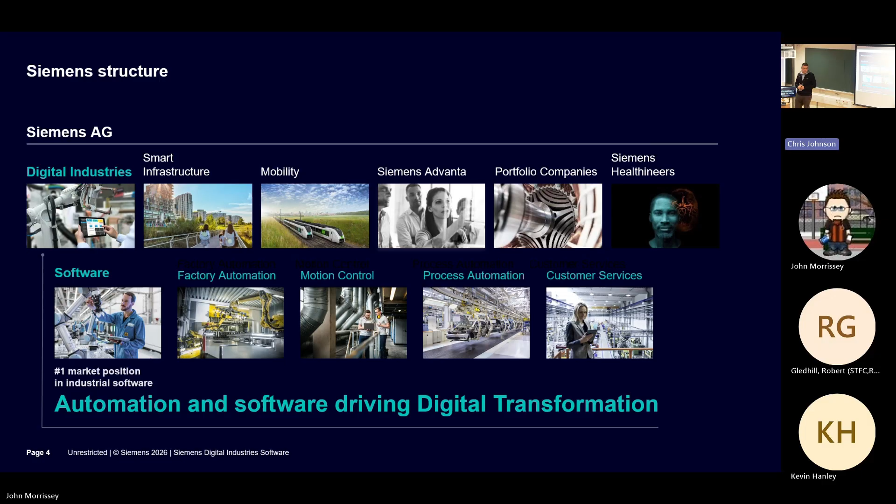So why combine DEM with AI? First, very briefly about Siemens. As part of the large mother company, which I'm sure you've heard of, there is a sub-company called Digital Industries, which focuses on software technology, and I work in the software division of that company. It's its own company, headquartered in Texas. And that company was very aggressively grown through acquisition, which is a trend we see in industry today with simulation software and, well, generally technology.

Because of the complexity of the problems that the customers are facing, the solutions are multi-physics, multi-method, and also require compute and require IoT. So a very broad portfolio of tools is required. The customers don't like to deal with multiple vendors. They don't like to integrate multiple vendors together, so they're looking for a one-stop shop for all those tools and interoperability between the tools, and that is why in recent years we see very aggressive agglomeration of software vendors into a small number of massive players.

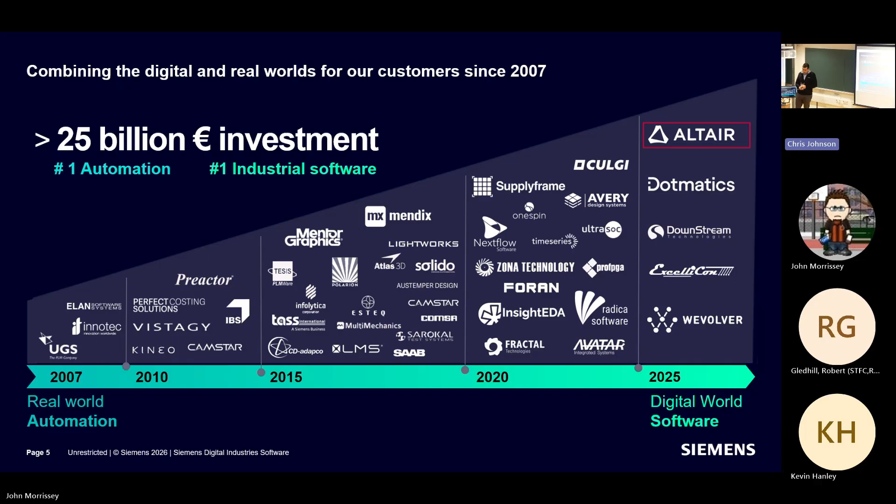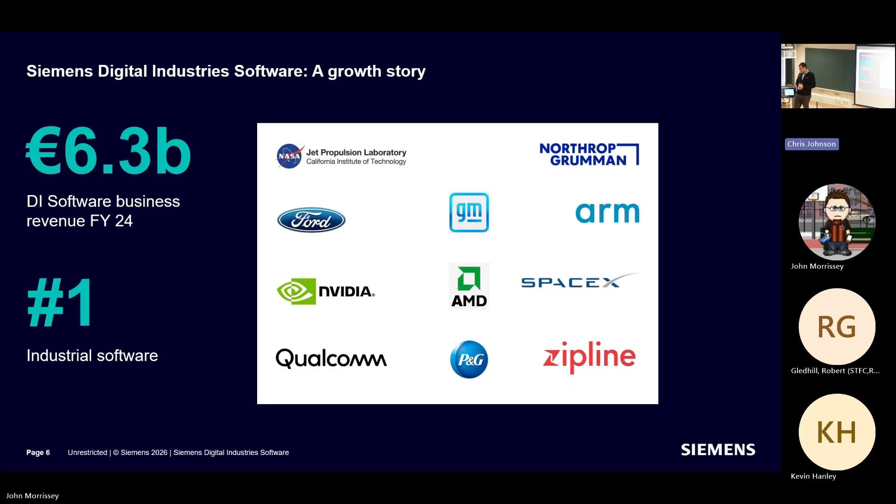So Altair EDEM comes into the Siemens family through the Altair acquisition, which was recently finalized. It's a $10 billion acquisition, the largest that they've done so far. And this makes Siemens Digital Industries the #1 industrial software company, I think, probably per revenue. Looking at the revenue, that's probably realistic. 6.3 billion last year. This year will be higher because of the Altair acquisition.

Now the Siemens combined portfolio is very broad. Altair's portfolio was quite broad on its own, spanning simulation, AI, high-performance computing, and IoT. Now with Siemens, we have even greater breadth of tools. I won't go into detail other than to say that Altair is part of them, somewhere in the simulation portfolio. That is the Simcenter line of products.

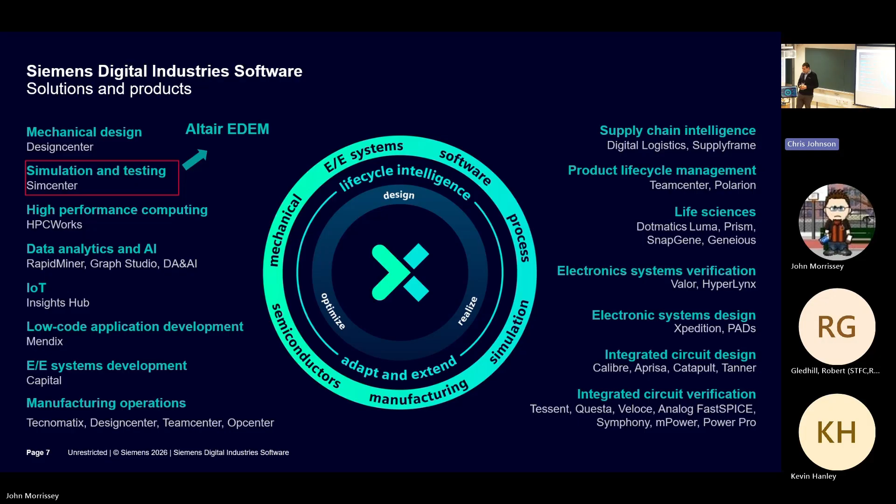EDEM was mentioned kindly before. I'm sure that a lot of you are familiar with EDEM. It was the first commercial DEM code, still extensively used in academia also, but more so in industry, I would say. And this is where I work as a solution specialist.

Okay, so before we go into how we use DEM and AI, I find it always useful to just remind ourselves what the customers actually want. And it's very different to, I think, the needs of academia. But our customers essentially want to do things faster, cheaper, and better. And that means reducing time to market and development costs, reducing waste, energy, materials, so doing things more efficiently, improving

performance and operations. But really, the time to market is, in my experience, the primary concern in a very wide range of industries. Okay, so doing things more efficiently matters. Improving performance is always important, but time to market is really crucial today in a wide range of industries. And this brings us to how our customers use DEM.

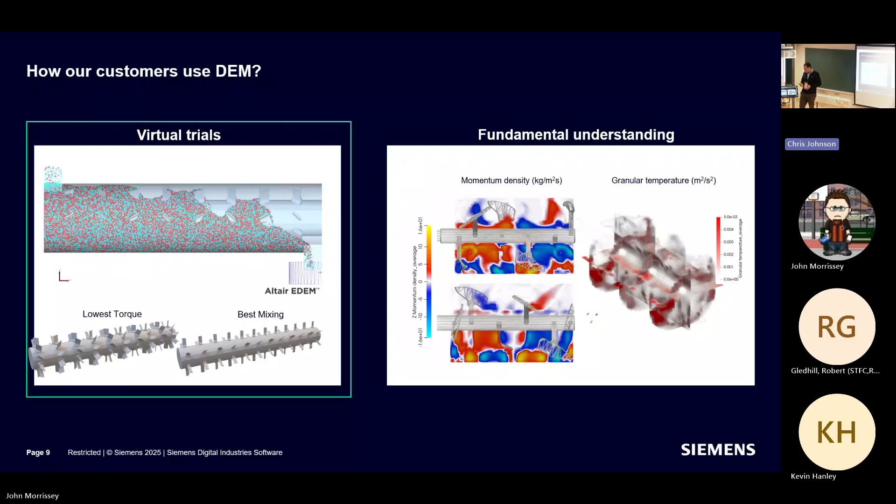And this is how we make most of our money, because running virtual trials requires a lot of compute, a lot of usage, a lot of units, and that is why we're focusing on the needs of that segment of the customers. Okay, and so with this in mind, what do they need, and how does this relate to DEM codes?

First and foremost, they need efficiency, and by the way, we have significant gaps today between what they need and what we can provide purely with simulation. And those gaps are not going to be closed anytime soon, but we can try to partially bridge them with AI. And one of them is efficiency, so the ability to run tens of virtual trials rather than hundreds. And here we can leverage simulation-assisted AI in much the way it was described, and I'll show you some examples too.

We need speed, so really now customers are demanding seconds of runtime, but certainly not days. Seconds for real-time model-based control, for example. Obviously, with DEM, that will be challenging. And they're demanding accuracy, and the accuracy, in my experience, in our view, actually particle size is the primary challenge.

Of course, physics is important, right? And having the wrong contact model would affect the simulation negatively. But it's even worse when you don't coarse grain properly. And the problem is that coarse graining obviously is complex. You have to worry about how to scale the micromechanical parameters to maintain the micromechanics. You have to worry about inertial effects. You have to worry about maintaining the fabric, so bottlenecks and jamming.

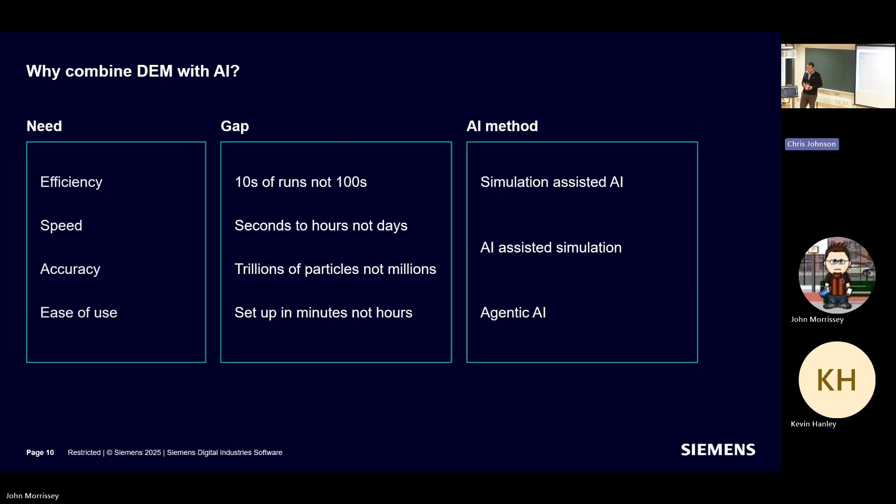And here we can help some with agentic AI, as was already mentioned. So again, I think the previous talks were excellent, by the way, in terms of detail. So we employ very similar methods, essentially, at Siemens.

Okay, so simulation-assisted AI. Let's start here. And that's really about how to run fewer simulations using AI. So the idea of the reduced order model was already introduced. It was mentioned that measurement data is scarce, poorly formatted, could exist in an unstructured way in different parts of the organization. It's expensive to generate. There's insufficient metadata. So even if you have measurements, it has not been documented under what conditions the measurements were performed, for example. So you don't know whether you can take measurements from different parts of the organization and put them together, and so many, many challenges.

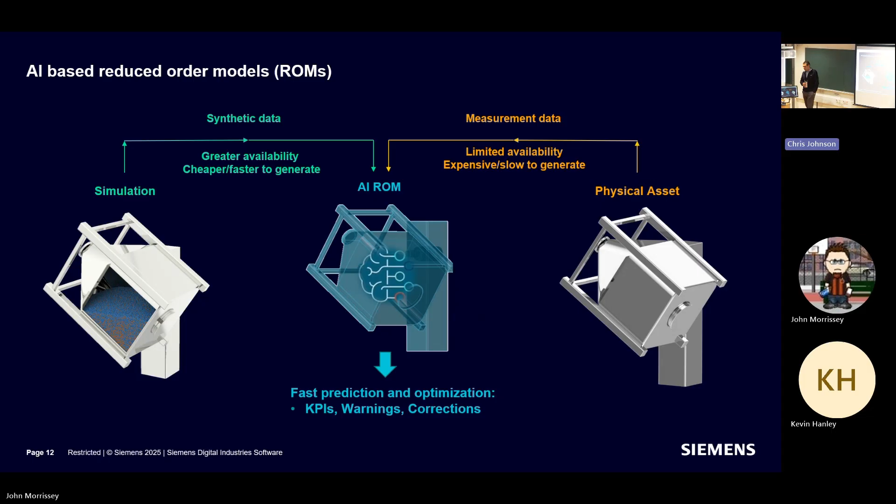And the industry is not ready, I think, to solely rely on measurement data today, at least in my experience. And so synthetic data has tremendous value. And we can derive that from DEM simulation or a physics-based simulation method. And the advantage of having an AI-based reduced order model is this fast prediction of only what we care about. You know, some key performance indicator, maybe some warning, maybe some go, no-go condition, and so on.

In our portfolio, we have a very large number of different methods. I'm not going to go into everything we have. We have multiple platforms, but I'll make a point that we can build ROMs from many different kinds of data, starting from static samples, you know, DOEs and the like. We can have 1D signals all the way to 3D signals and fields, and we have machine learning and AI methods that can model those different types of data and model it as a steady state ROM, so provide a static answer, or a transient answer, so an evolution of some data.

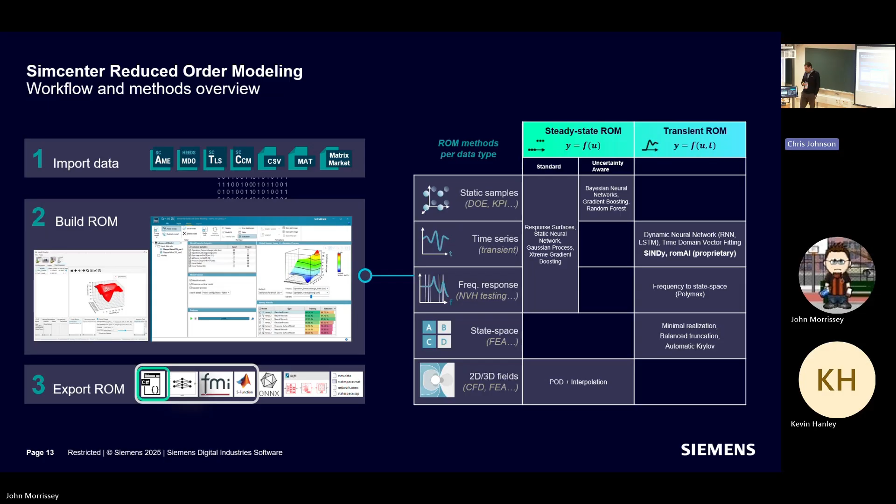But the one exception for us, actually there's two major exceptions, but one of those is if you have time series data coming from EDEM, you know, you could have quite a few points in that signal. And then if you have multiple trials, then you actually accumulate quite a lot of data. And if you use all the data in that signal, then you can begin to see benefits from using neural networks rather than something simpler, you know, a simpler meta model.

And mostly we've been working with something called romAI, where the underlying idea is quite simple. We assume that the evolution of the signal obeys a very simple first-order ODE. And we further assume that the first-order temporal derivative of that ODE is a function of a set of states, the derivatives of those states, and a set of input parameters. And then we use the neural network to simply predict the derivative at each time point of the signal. And we can construct the signal that way.

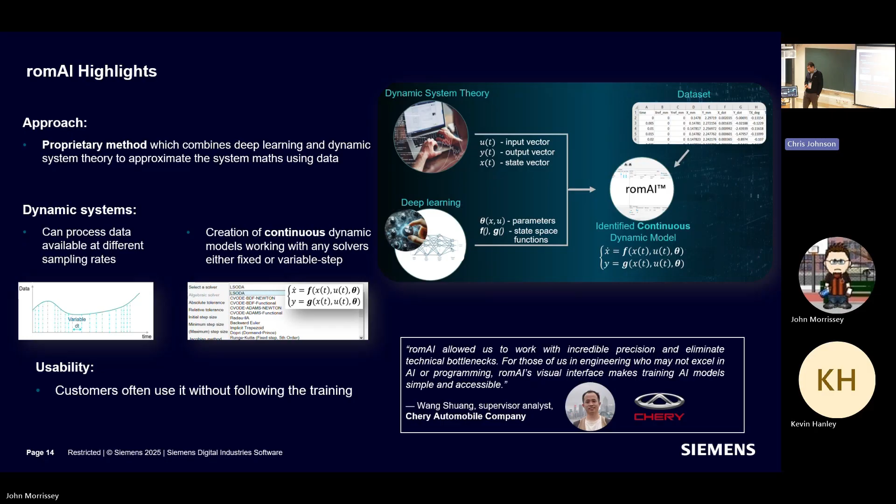So this is not a very complex idea, but actually in practice it works quite well. And this is really inspired by system control theory, and we have a bit of neural networks thrown in. I can give you more details on the algorithm, but I think you can probably figure out more or less how it functions. So this simple approach has been quite useful for us.

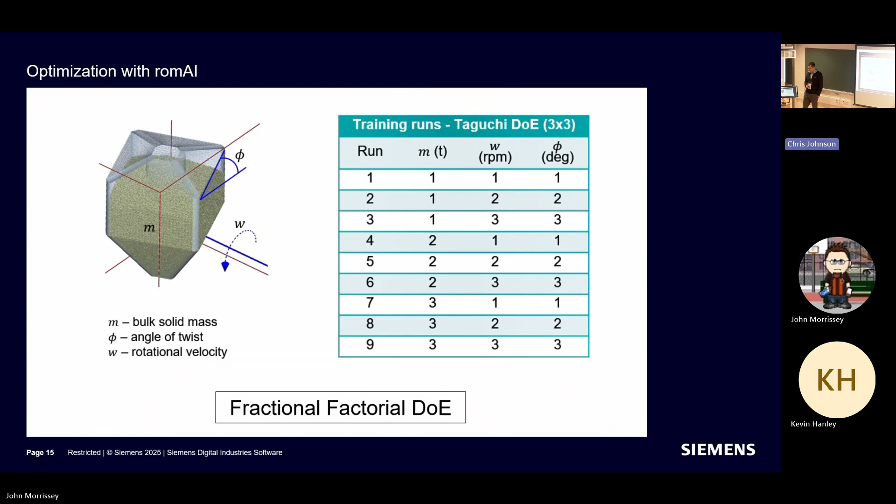I'll give you a simple example here with the bin blender. So, you know, we may have a full 3D model of the bin blender in DEM that could solve, let's say, in a day or so, because it's quite a long mixing time. And then we generate a relatively small number of data points, around 9 here, with different operational parameters.

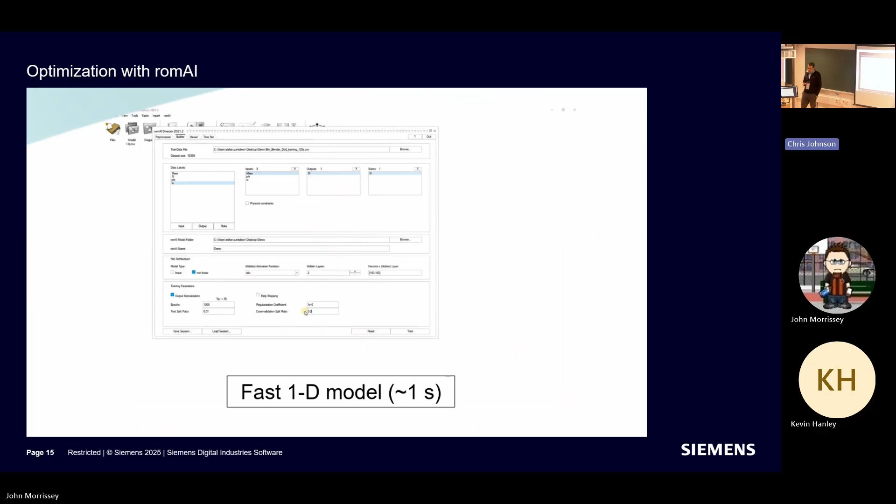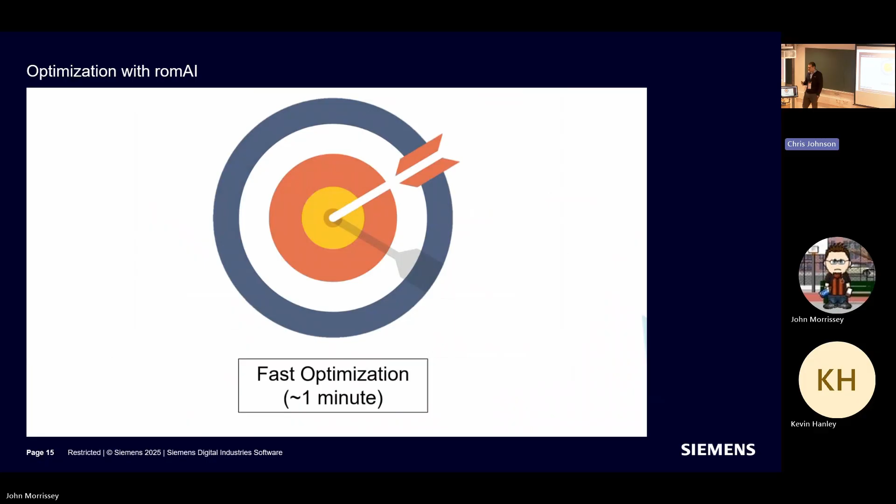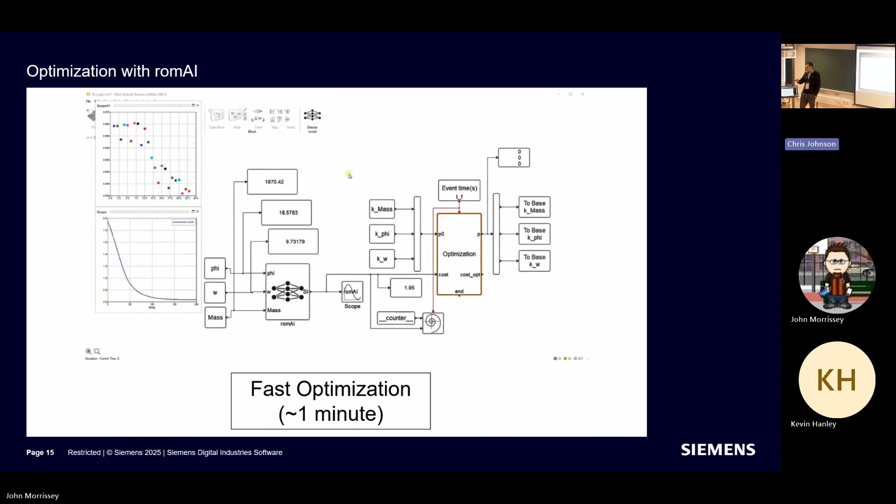And then we can train our reduced order model with a graphical user interface, which is very simple to use. A non-expert can use it. You can make settings there if you know AI, but you don't have to necessarily. And then we can use that to very rapidly optimize the system. So you're seeing here real-time predictions of different operational parameters and the evolution of the segregation index. So we can explore many points in seconds.

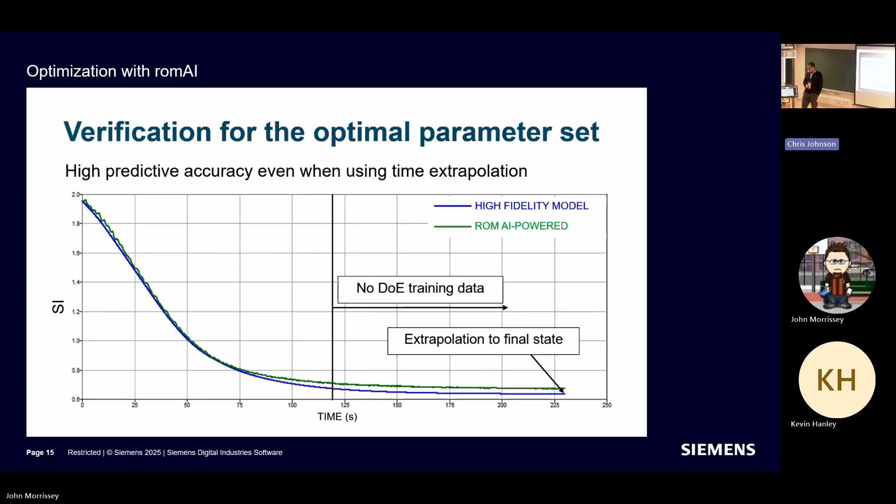And what we find is that on average, with a surprisingly small amount of data, we can predict with sufficient accuracy for practical purposes signals like that. So you can see here the segregation index evolution of the optimum that we've identified. And we can also extrapolate forward in time. So we didn't even show training data beyond a certain point, but the algorithm is able to also predict forward in time beyond the training time. And this helps do things faster.

Now I should say that everything I showed you, and I'm not going to go into the workflow, but everything I showed you can be completely automated. And that's very important for our customers. And it can be completely automated in study engines. We have now, through the acquisition, 2 different study engines, HyperStudy and HEEDS. But essentially, they do very similar things. So they can interface with the various tools.

They can generate variants according to design of experiment configurations, or intelligently sample the parameter space according to some other algorithm. And we have a breadth of algorithms for that. Fit automatically reduced order models, including the large variety that we have in the portfolio. And then apply optimization algorithms of the kind that already were presented. The genetic algorithm actually, we find in practice has been most widely used and most effective because we can sweep the parameter space more thoroughly than with something like a gradient descent-based algorithm.

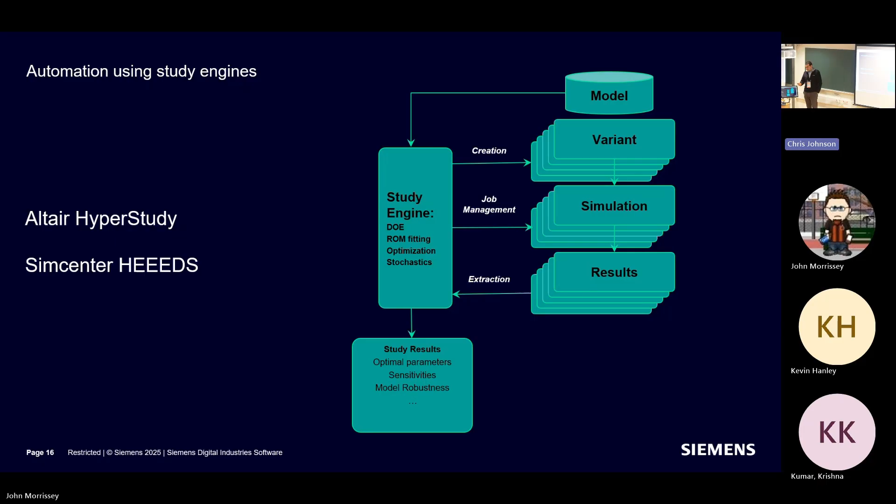But you do have recourse to quite a lot, including you can write your own algorithms if you like and plug them in to that study engine. And then you can also perform some data analytics and so on. But essentially, we can wrap the whole process in a GUI and do things automatically. And we find that's key for the users always. How they use it: at this point, an obvious example would be calibration. So I won't go into that. It was already shown. So we can clearly calibrate using this method.

But often they also perform geometry optimization, also similar to what was presented before. However, we can do morphing of the kind that was shown, but that's rare. First, the manufacturability argument was very good. We find our customers tend to try to stick to simple geometries and simple modifications. Also, sometimes the outcome is counterintuitive, or in any way they don't trust it, right? So they like simple changes, and I'll show you a simple example. But the important thing is that everything is automated, including the job management, right? And that should include cloud compute.

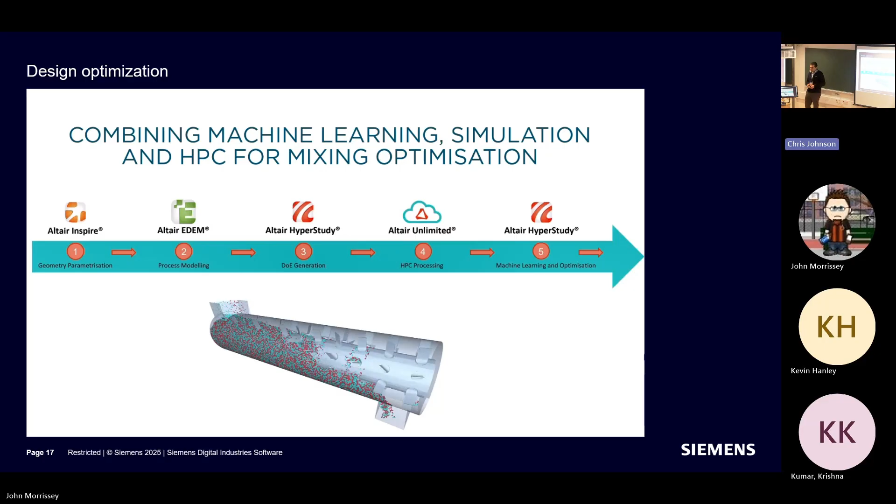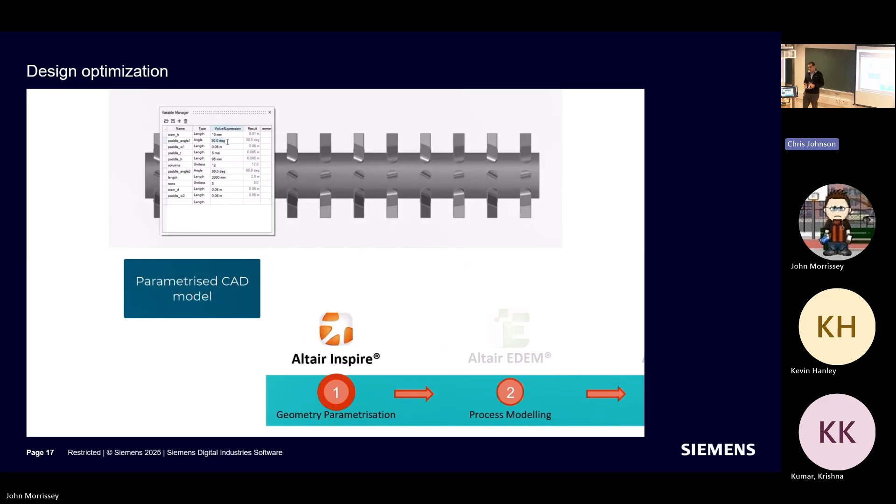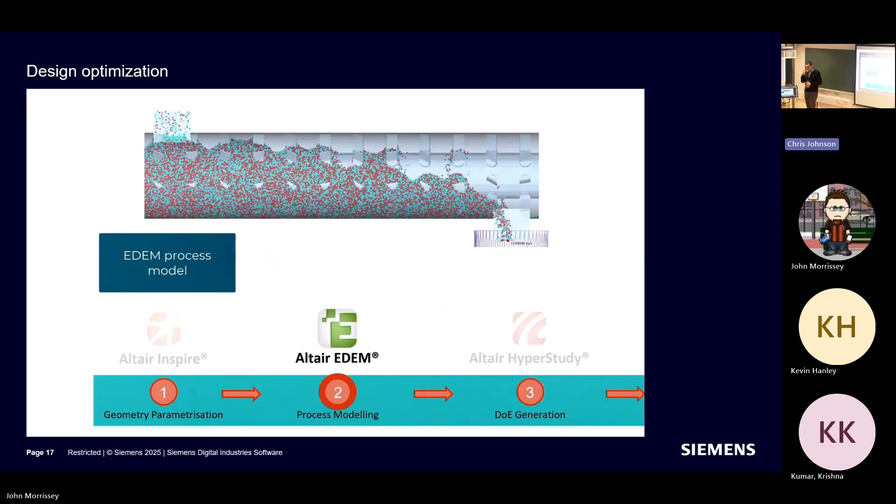So this is a toy example, but a very common case. So here we have a continuous mixer that we need to optimize. And we can produce a parameterized CAD geometry in one of our tools. And you can see that the changes are simple. It's just the size of paddles and their orientation. So again, we find free morphing to be rare. And then obviously you need to set up a base EDEM case. But after that, everything is automated. So the study engine takes over.

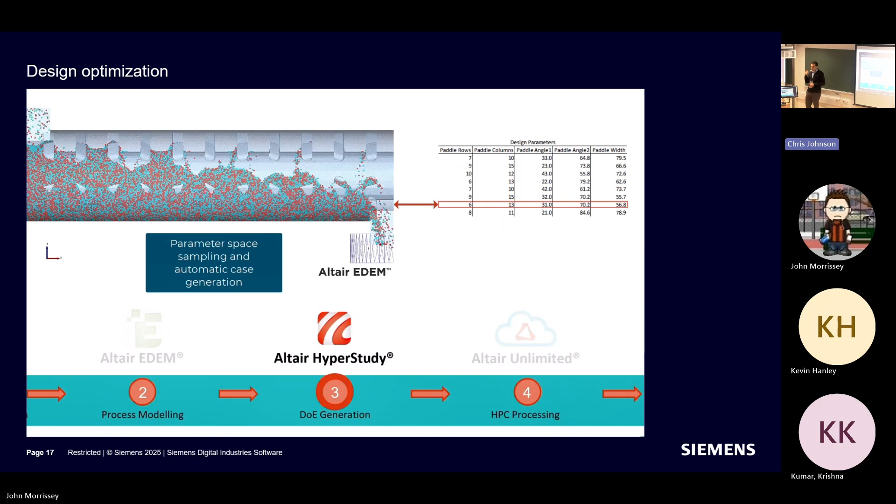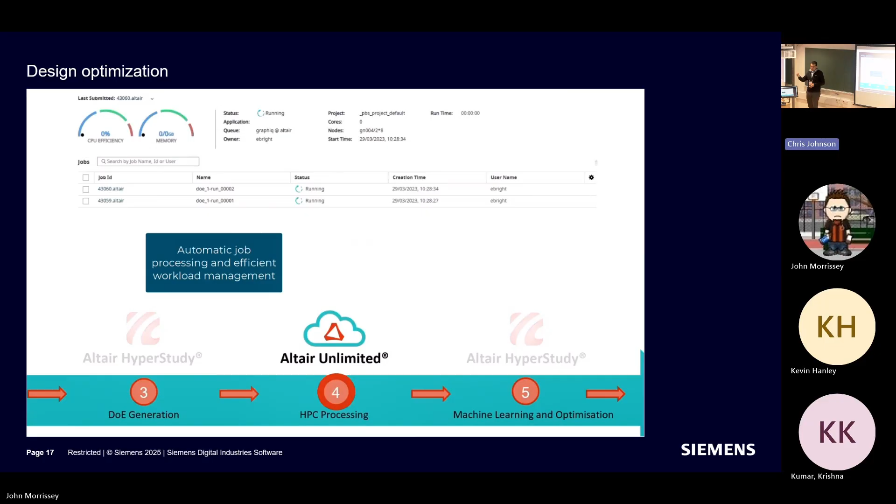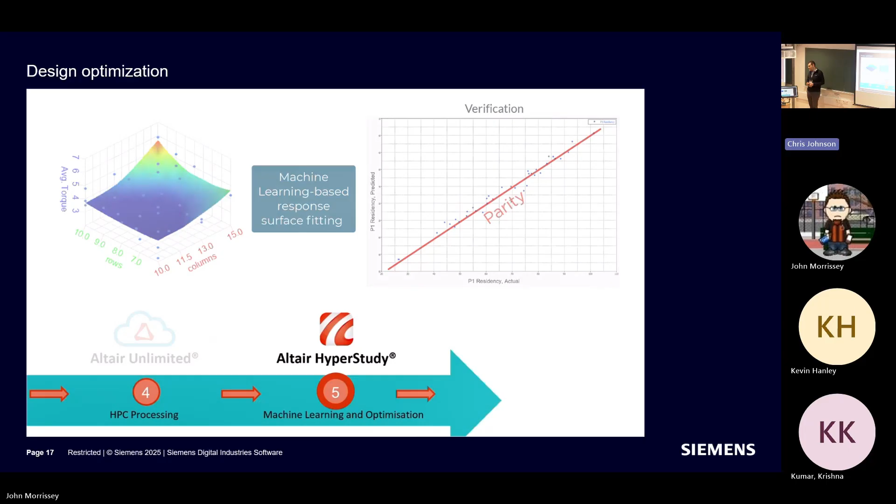It can sample the parameter space, generate the cases. Crucially, it can send them to cloud, which is becoming extremely important today. We solve everything on GPU. I mean, 90% of our usage is GPU, and more on cloud. So the jobs need to be sent to cloud automatically. We don't want users to manually submit those and retrieve them back, and then the reduced order model can be fitted iteratively, and we can apply the optimization on that reduced order model.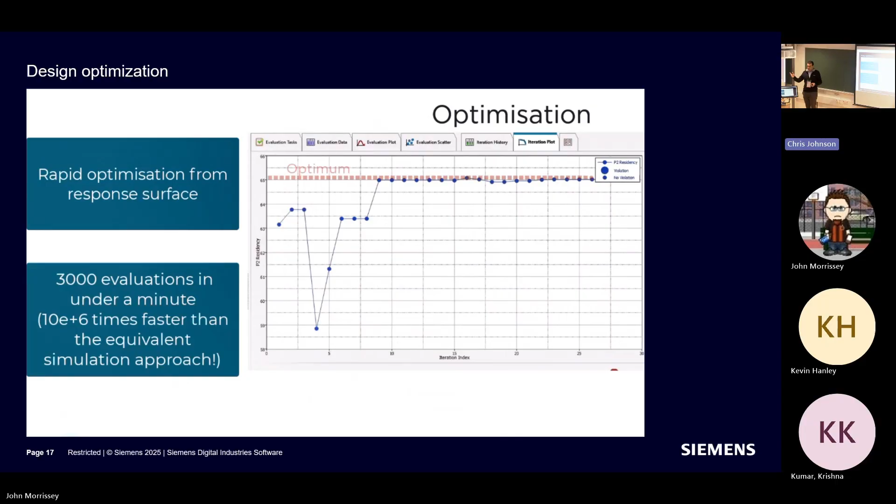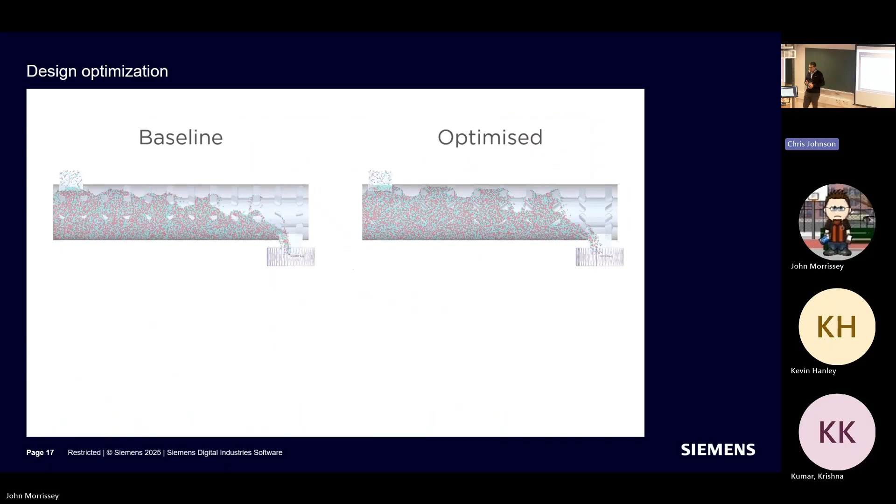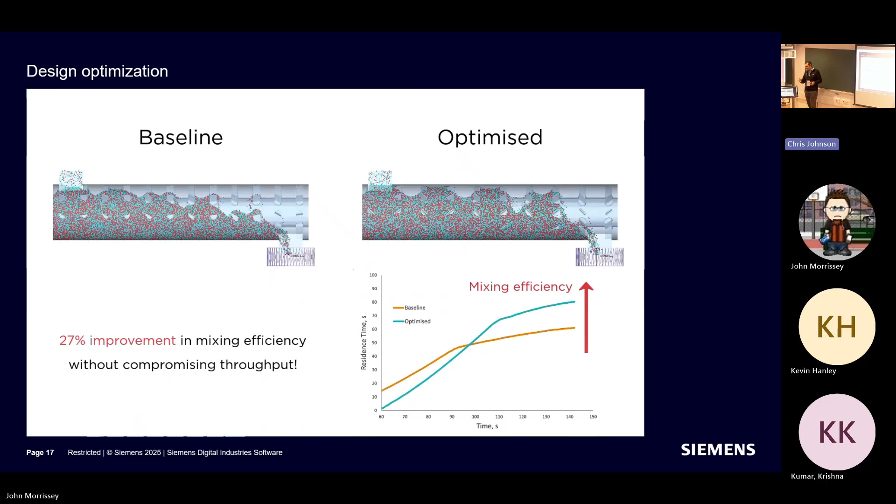And here, this is a result of a genetic algorithm, actually, where we explore thousands of evaluations very rapidly, but we really just train on 9 or 10 samples. And then we can arrive at some kind of optimal design. So in this case, the objective function is to improve the mixing efficiency. So very similar to what was shown, more automated, and the importance of high performance computing on GPU can't be overstated.

Really, to achieve something in practice, you tend to need GPU for this kind of application. And here's a customer, so a real case. Not exactly a continuous mixer, this is actually an aggregate dryer. One of our customers optimized this way with some help from us.

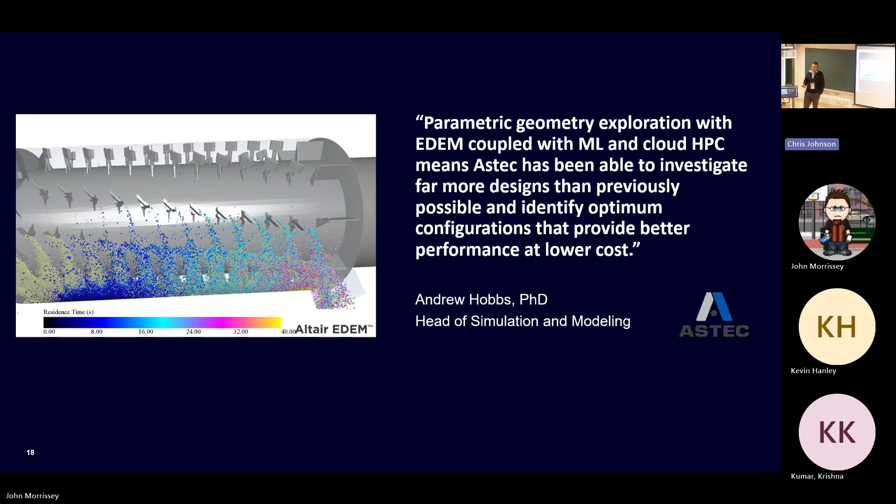And you can see that they were very pleased with the ability to perform virtual trials, which helped them optimize much faster and cheaper. And that's just one case that we can show. It's quite common to be able to do that.

Now on the point about calibration, I already mentioned that coarse graining might be an even greater challenge, but if you look at calibration, although we can automatically calibrate using the tools I just showed you, and it's not difficult to do, our customers are not satisfied with that. They really don't want to spend any time, any compute on calibration. And that's why we developed material model databases for them.

And this is an example here. We have a built-in database in EDEM with thousands of material models for different responses. One is the FT4 rheometer basic flowability energy. Whether you like it as a calibration response, obviously it's system dependent, it's one of the popular tools out there.

And by the way, on calibration, I should mention that the availability of the tests is crucial. We may like to recommend quasi-static tests and dynamic flow regime tests together. We might like to recommend a wide range of stress magnitudes. But really, the calibration is dictated by what's available, right? So even if you have guidance, and that's a great benefit to the community, that doesn't mean it will be followed, unfortunately, because we don't always have access to the measurements.

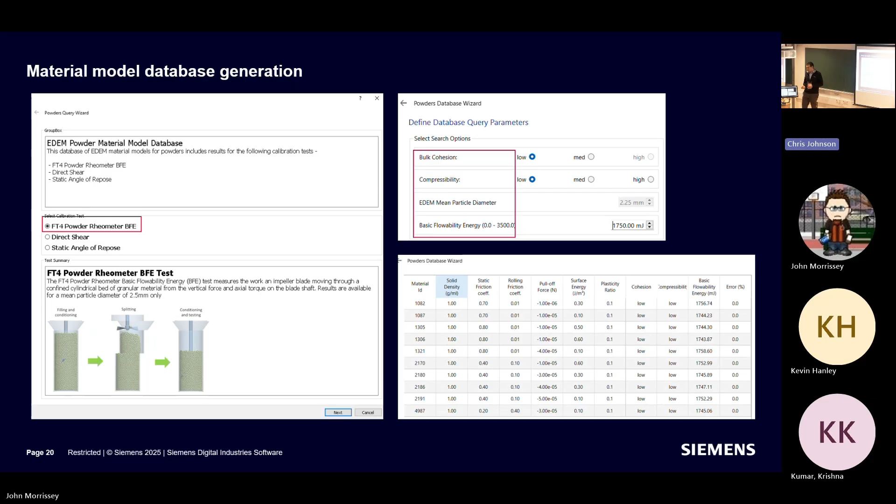Okay, so that's how we use simulation-assisted AI. AI-assisted simulation is more limited today. One idea which wasn't presented but we find extremely useful is to replace bits of simulation with AI, again ROM AI here. This is a very common example: a coupled DEM multi-body dynamics simulation of a wheel loader. What we want to know is what the sizing of the boom supporting the bucket should be.

And if you run the coupled job, it's very slow. However, you can run a few coupled jobs and train a reduced order model to predict the forces on the bucket hinges as a function of the orientation, position, and velocity of the bucket. Then you can plug that into an MBD model only and remove the particles. So now you can run your design iterations.

You can change the boom size, configuration, and so on very rapidly, because the MBD model runs 10 to 100 times faster than the coupled job. And you can see that the prediction of the dynamic response is again good enough for practical purposes; we especially care about the peak, and the peak prediction is reasonably close to ground truth. So this is a very common approach for us to speed up coupled simulations.

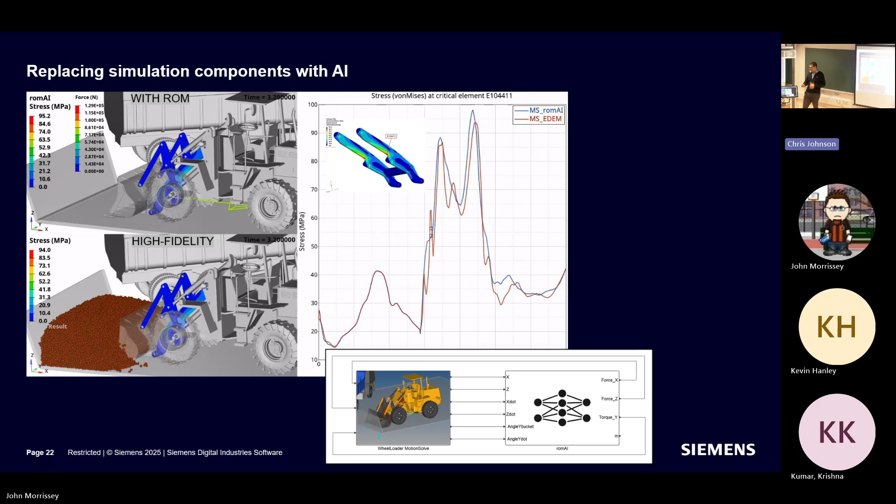And a real world example, excuse me, my clicker malfunctioning there.

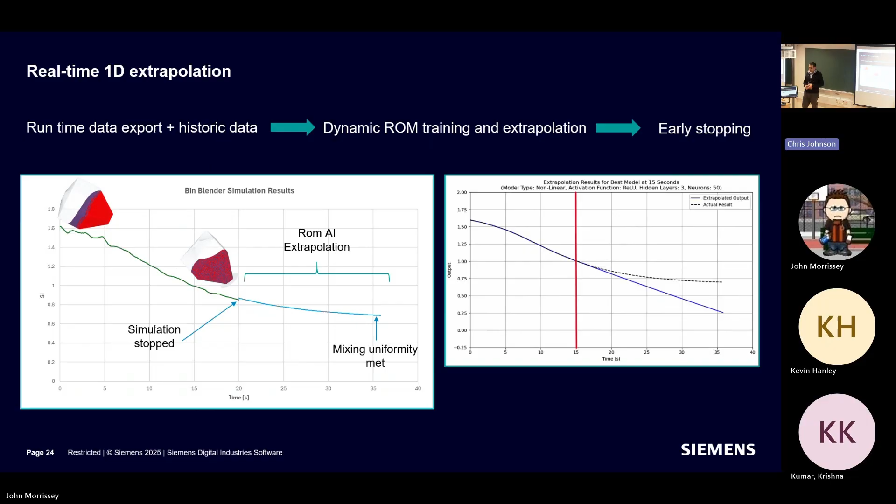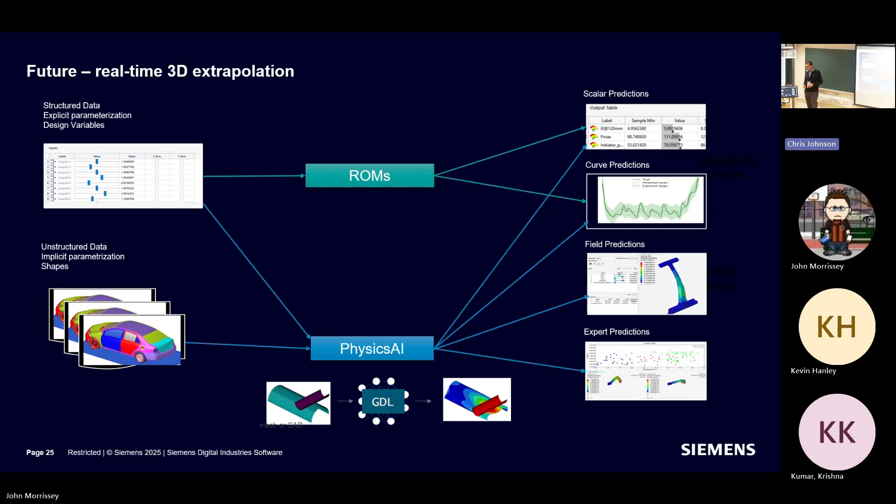So that's now, and in the future, we'd like to attempt real-time 3D extrapolation. Today we have geometric deep learning tools which are very good at predicting the temporal evolution of 3D field data. Here is an example of pressure distribution on a vehicle, for example, ground truth versus ground truth on the bottom versus the prediction. We have many examples like this. It's very popular now amongst our customers, but it obviously applies to continuum fields.

So what we might attempt is to perform the continuum transformation in the usual way. Compute the fields that we care about, what we're permitted to compute first of all, obviously, but amongst those, the ones we care about. And then we can try to forecast the evolution of the continuum field, and then we might even try to rediscretize, and we might do that iteratively, for example. So that's an idea that we are going to start exploring.

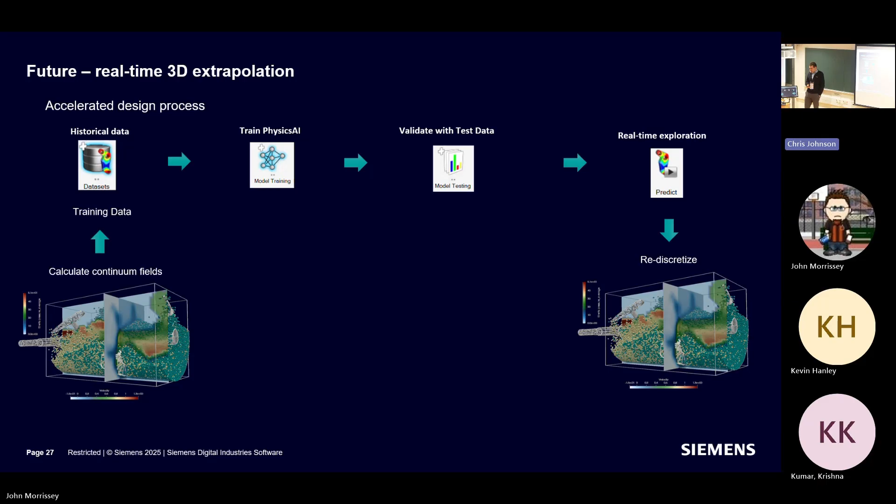It's different to what Professor Schilder showed, but it's another idea of how we can have some AI-assisted solution, like accelerate the solver using AI. So in our case, we transform into a continuum first, and then back into a discrete, if possible. Of course, you have many challenges. So this is a Horizon 3 idea, I would say.

Okay, finally, the last point is agentic AI. So how to set up simulations faster with AI. So, AI agents were introduced already, typically large language model based. You can have different levels of kind of fidelity of the AI agent or its capabilities. You can have a simple chatbot that just spews back knowledge. You can have a co-pilot that can set up things for you, and you can have an agent that is kind of semi-autonomous.

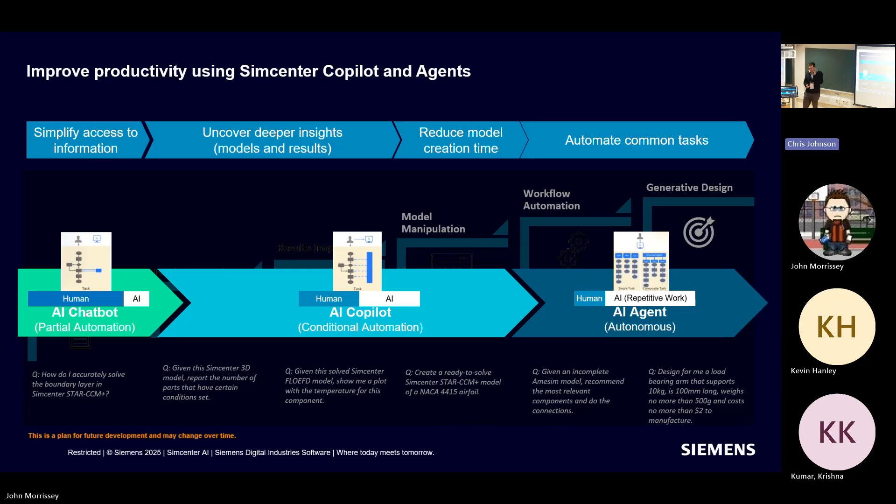And we're looking at a co-pilot at the moment. We don't believe that a semi-autonomous AI agent is within reach, short term, and even desirable, actually. But certainly a co-pilot is.

And so similar to what was shown, we have a prototype of an AI agent for EDEM that actually should be a co-pilot for EDEM that can provide useful information and that can set up simulations. And you can see, actually, it's performing better than you anticipate.

So if you look at a vague prompt, like make me an EDEM simulation of a 45-degree pyramidal hopper, and I don't have CAD geometry, make me CAD geometry, right? So you don't even give it the geometry of that. And by the way, it has never seen a pyramidal hopper, so never did we give it an example of that.

With a few tricks to make it more robust, from that single prompt, it set up an entire EDEM simulation that runs, and it's very reasonable. It's close to what I would have set up as a first attempt, and it can perform. We're pleased with the performance. Pleasantly surprised - possibly already useful enough to be released amongst customers.

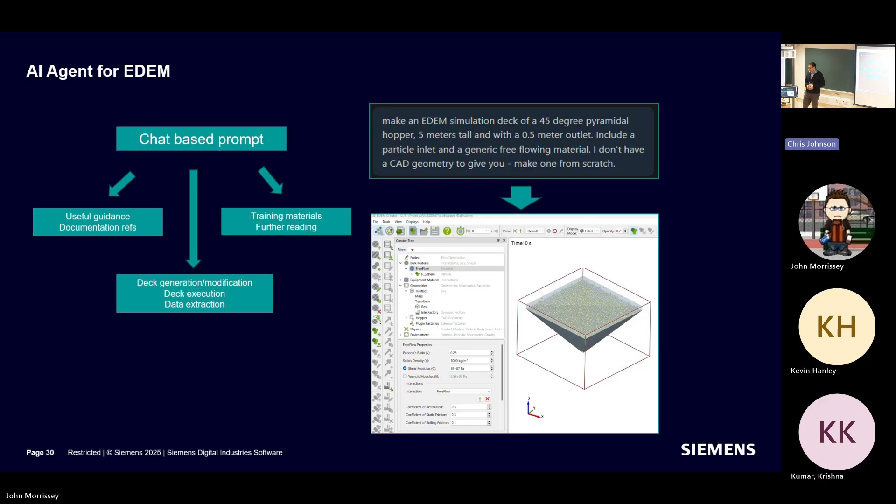So there's a lot of value, I think, in co-pilots. Now, the vision is to have automation across the entire digital thread, so-called, and that was mentioned also by Professor Schilder, essentially. But it's an orchestrator agent, and then you have different specialist agents that work with the orchestrator agent to deliver something complex.

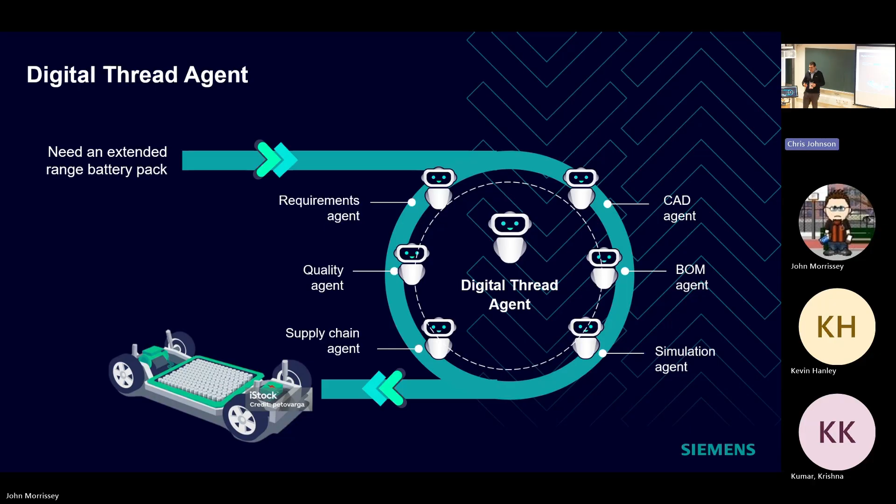We're working hard on that. In my view, that may be a way to be robust enough to be applied with customers broadly, so to be released in the wild. But we're working on that. That's the goal. Okay, now finish, because we're getting on time, with just our view on what is needed to position a DEM code well for AI.

And there's input, solver and output needs. So on the input side, we find a text-based input is essential, and it's very important that it's easy to parse and that there is a validation schema. Ideally you would - and we find JSON to be excellent, actually ticks those boxes.

But you need to be able to validate the input independently somehow, and it needs to be easy to parameterize. And then, crucially, you need to document it well for AI.

And here we have a problem, because the paradigm is we're going to generate documentation with AI. But the problem is that the co-pilots then read the documentation to provide suggestions, provide advice, and so there's a really bad loop. Actually, you need people to write the documentation and to write it with AI in mind, because we find our documentation, for example, was very poor for AI. It needed to be written in a completely different format, specifically for the agent.

So that's very important. Then on the solver, I already mentioned multi-GPU. We find multi-GPU is essential today - 90% of our customers use multi-GPU. It's 2 orders of magnitude faster on average. And you need to generate a lot of data, and so you need efficient solvers.

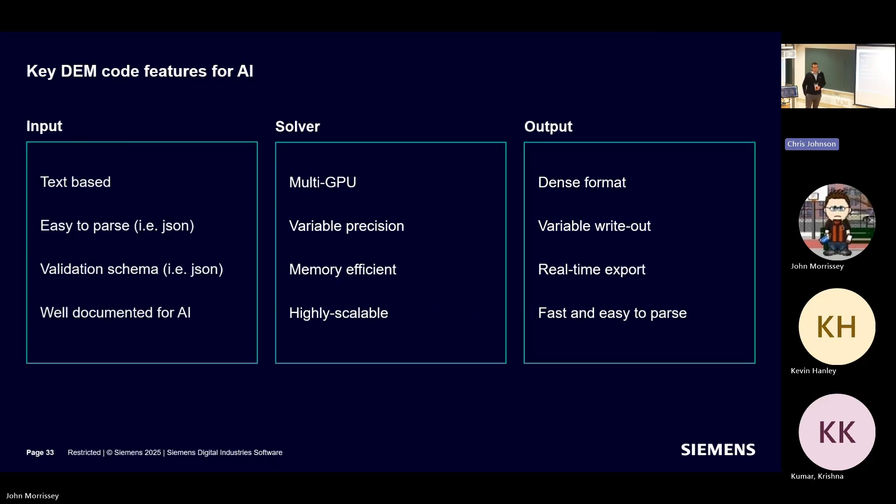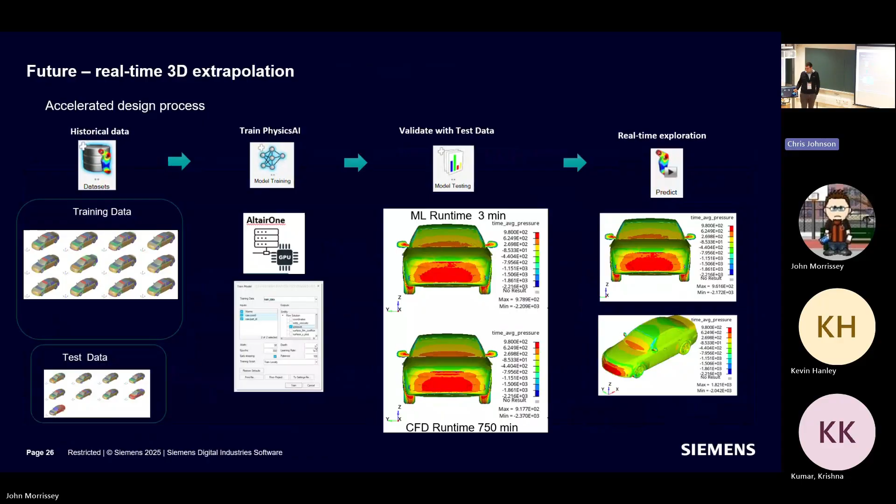You have shown these huge number of simulations where you build up your reduced order models for calibration prediction. That was quite interesting. Are these reduced order methods all of the same structure? Do you think about combining them in the field of, for example, ensemble learning, or prediction of new reduced order models without doing the simulation? If you already have a huge database, maybe you can have the first shot.

Yeah, that's a great point. That's exactly what I did initially, around 5 years ago. So here we just have 100 runs and we make a large number, and that's enough. But for the angle of repose, which was the original calibration test in industry—that's 90% calibration, for good or for bad—we had about 14,000 data points. And the challenge there was the size.

I mentioned size. So we have 14,000 data points at 4 different sizes. What if you have a size in between? So we try to use all the data, but interpolate between sizes. And even with 14,000 data points, and this was JKR, so a relatively simple adhesion—same shape and everything—it still struggled to predict across sizes. So the greatest challenge we find actually is size.

So if you have ideas, I'll be happy to hear them. Professor Gouverneur also has some papers on that, but he also struggled a bit to span the size. So the size question is the primary challenge for us. We want to be able to give the parameters for any size. Granted, obviously the coarse grain system is dependent, but at least for the response—forget whether it's applicable when you move to a flow regime or whatever—if we can give a prediction for a different size, that will be great.

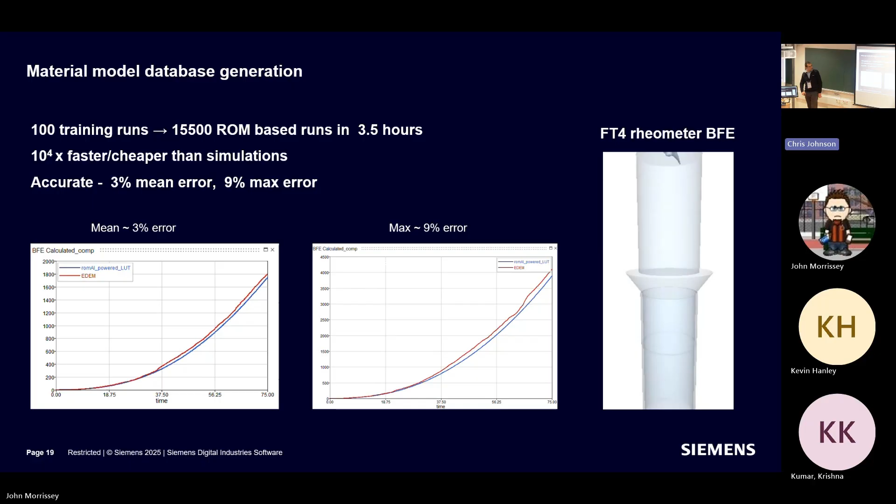But in that particular example, the point I'm getting to is that you can use the AI to do a parameter sweep, and you get a set of parameters. So it comes out like static friction 0.5, rolling friction 0.5, restitution 0.5. Perfect, that's my material. Do you then just take one run on that, or would you take multiple replicates of the same one? Because when you change the filling, the static generation, with the same parameters, you'll get a different response, the natural variation noise. Do you introduce multiple runs at the same parameter set to capture that variability, or is it always just one run, one set of parameters?

No, it's a great point. In this case, you didn't have that much variability, but if you do, then you need some kind of average, no question. And you need to smooth that. HyperStudy will handle that for you. You can automate it in HyperStudy. So it's very flexible. In HEEDS it's the same. You can do almost anything that you like, really. You can trigger whatever executables. You can perform whatever manipulations on your data, including third-party tools. So you can automate that. That'll be trivial to do, but it's important, as you say.

Stochastic effects. You can analyze stochastic effects, and it can make decisions. For example, you can tell it, estimate the stochastic effects, and if they're above a certain threshold, perform additional runs, take means, and do that until you're happy that the coefficient of variation is acceptable. You can tell it that.